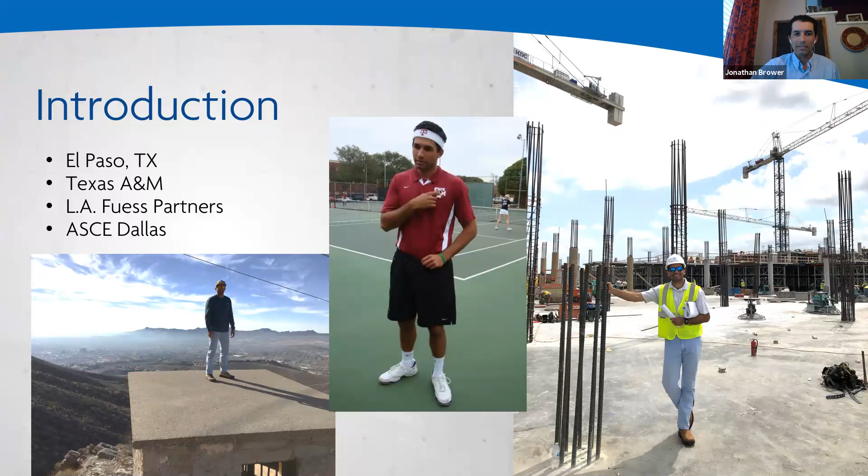He just turned 6 months old this past Sunday, and he's really the best part of 2020 so far. He brings a lot of joy to our lives, and he's a lot of fun to be around, and I can't wait for him to get home later tonight from daycare. I really enjoy running.

Running is my big passion outside of the work I do and ASCE. I enjoy waking up early in the morning, getting those runs done. I'm also a big Dallas Stars fan, so watching the Stars make that run to the Stanley Cup final this year was a lot of fun. Noah got woken up a few times by me yelling at the TV whenever they kept winning, so I'm sure he's in for a long ride with that too.

So now I'll hop in and give a little background on LA Fuess Partners and who we are and what we do. We are a building structural engineering firm. We don't do any heavy civil structures, we don't do any bridges. We are primarily focused on building design.

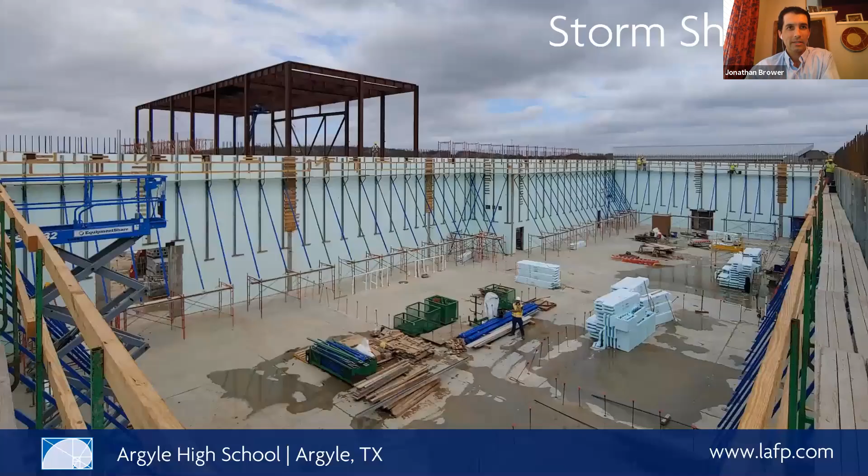Going along with K through 12 design, a lot of those projects now involve storm shelters. These are hardened buildings, again, designed to withstand varying degrees of tornado force winds. They require a lot of unique detailing and extra beyond-code-level design to ensure these buildings don't collapse in the event of a tornado.

Blast design is another thing we've gotten into, especially out there at Terminal D. Fascinating story that was before my time at LA Fuess Partners, but at Terminal D, the structural construction documents were sealed and issued for construction. They actually started drilling the piers out there on Terminal D. And then September 11th happened - the attacks on September 11th happened, and construction completely shut down.

They had to reevaluate what would need to be done within the terminal from an architectural standpoint in terms of new security features, and also how they were going to account for designing the exterior and the car side, basically part of the terminal, for any blast considerations if there was a terrorist attack in this area. So they had to go back and completely redesign a lot of the structure for some blast loads that were given to them by another consulting engineer. I thought that was a fascinating story about Terminal D.

For those who don't know, Baylor Scott and White is a major healthcare system here in Texas. They had offices scattered throughout the Dallas area and wanted to create a localized central location for all that admin to work in. So that's what brought about this facility. It is not a healthcare facility—it's an office, corporate office building, and a parking garage as well.

Let's summarize the project team. The core and shell architect was Perkins and Will, a very design-oriented architecture firm. They're always pushing the envelope, always challenging their engineers to come up with designs that are sleek and slim, really pushing the boundaries. It's a lot of fun working with them because they push us and produce beautiful buildings. Interiors was done by Corrigan Architects, another big architecture firm.

Civil engineer was RLG, MEP was done by Telios, geotech was ECS, and of course LA Fuess Partners—we were the structural engineer.

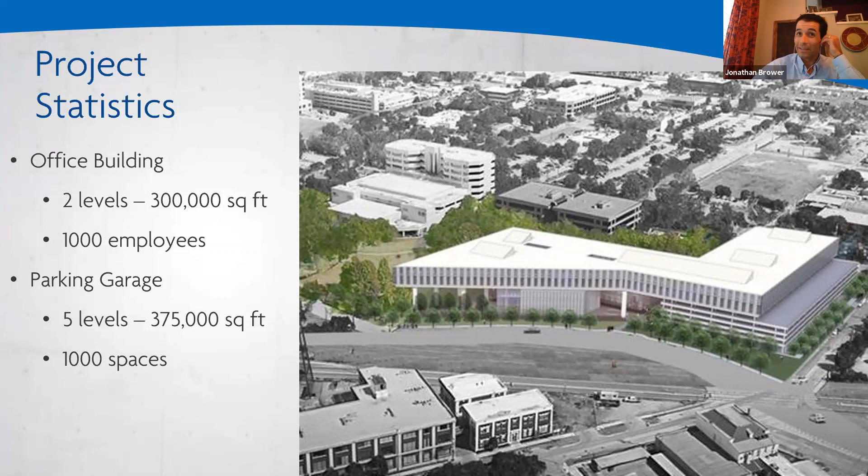Some major milestones and basic facts: total project cost was $70 million. We began design in early 2018—I think I first started engineering calcs and creating models around March 2018. We issued an early foundation package and began construction in October 2018. It was structurally topped out last summer, and about a month and a half ago they started having employees working there. I think they're at about 50% capacity right now.

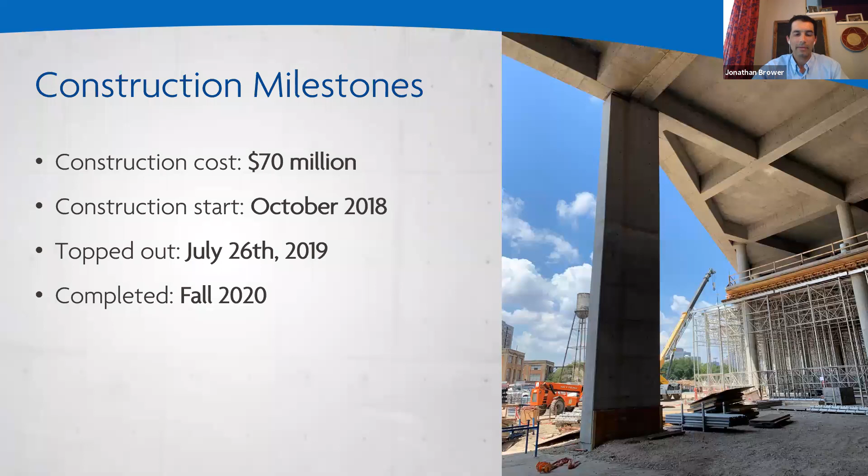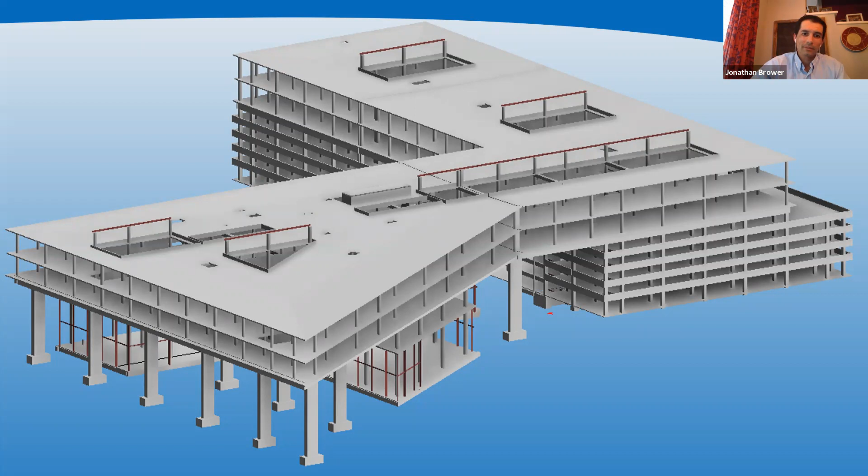This is a look from the other corner of the building. You get a good view of the parking decks and then the 2 big floor plates that make up that 300,000 square feet of office space.

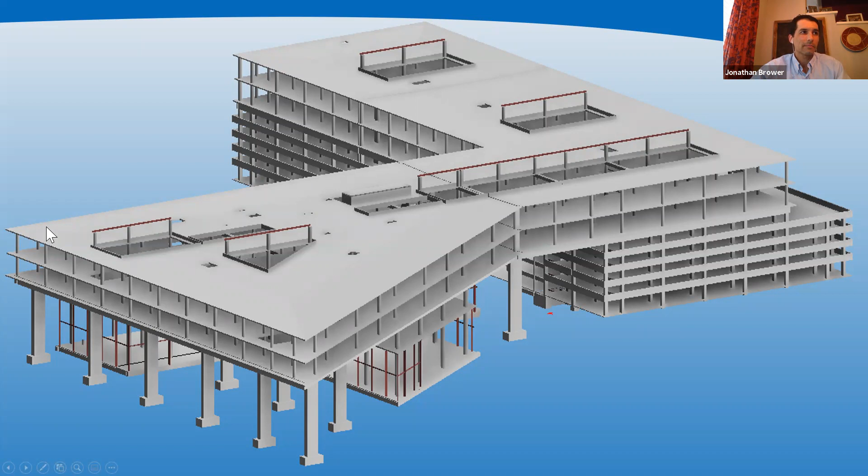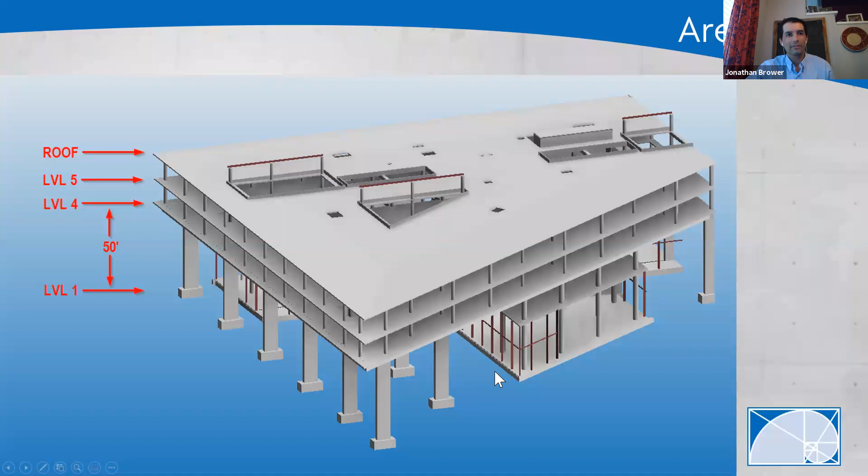Today I really want to focus on what I'll call area A and B, this trapezoidal shaped part of the building on the bottom left of your screen. What makes this part unique is that we do have some occupied space in the middle of the building on levels 1, 2, and 3, but the majority of occupied space is up on level 4, which is 50 feet in the air, 50 feet above our pier caps. We had a unique challenge needing these super tall columns, with extra complication added when the architect wanted to remove more than half of the columns. I'll explain that next.

This is a look at the typical floor plate at the roof and level 5, the two levels above level 4.

This was a pretty typical 8-inch thick 2-way PT slab on 24-inch diameter columns. There were no drop caps or drop panels. We had shear stud rails in the slab so that we could eliminate those. The grid spacing was 30 foot by 30 foot, which is pretty typical for an office. So this was, for the most part, a simple PT slab design.

For those of you that may not know what PT is, that's post-tensioning. So those are cables that are laid out in the slab, and after the concrete is poured and has reached a specified strength, they pull those tendons and pre-compress our concrete slab. The simplest way I can describe it is you imagine tying a rope to a tree, and then you lean back and pull on that rope.

Then you get your friend to come along and jump up on that rope, and they might start to sag a little bit, so you need to pull a little bit harder. But you can only pull so hard, so you bring your other 3 friends over and they all start to pull on that rope. As you all pull together, you're able to put more force in that rope and help lift your friend up as they balance on the rope tied to the tree. So that's what post-tensioning does - we're trying to balance out the loads on our structure, and it allows us to create a structure that is much thinner than you would ordinarily need without post-tensioning.

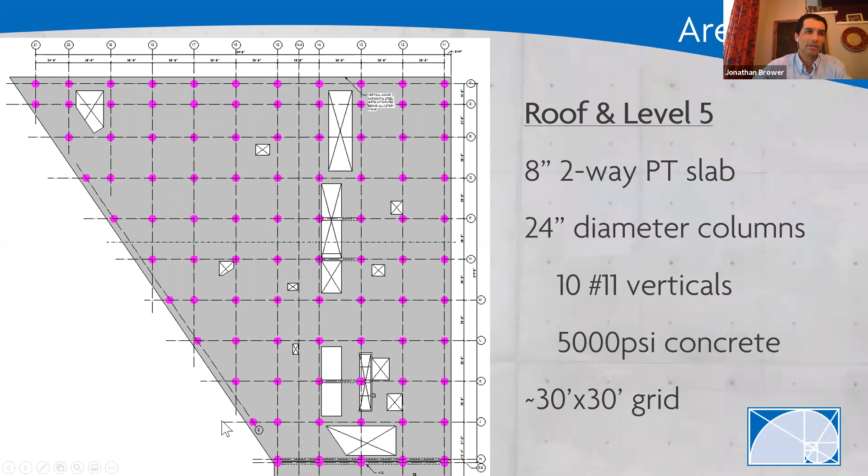But when you get down to level 4, this is what one of the engineers in our office deemed the super floor. The architect wanted to eliminate every other column in both directions. You can look closely and still see little pink dots - those are the columns above that go up to the roof level. In neon green, I tried to highlight the columns that go down to the foundation. So only the columns in green here go down to the foundation; all the other spots where you see pink dots, we had to somehow resolve all of those column reactions.

The way that we did that is we created this network of 3-foot wide by 5-foot deep transfer girders, outlined in blue here. It creates this waffle slab looking kind of structure. These are PT girders acting in a two-way fashion so that we can transfer all of these column reactions out to our big green columns that actually go down to the foundation level.

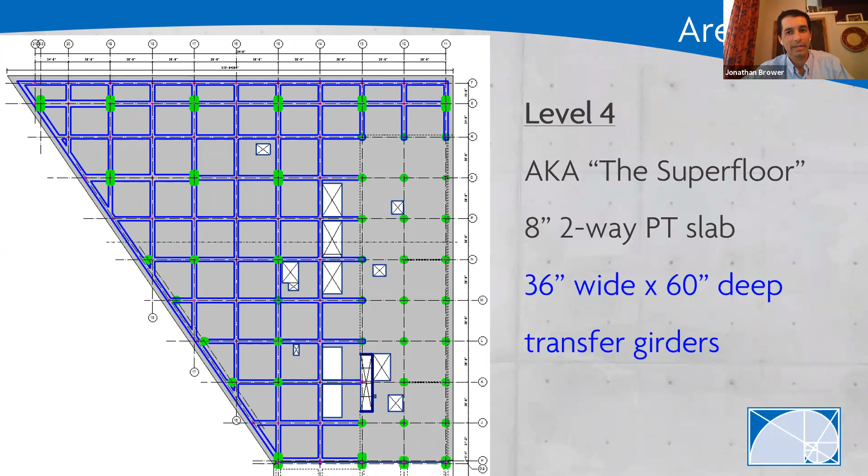I'll zoom in a little bit here on the pointy corner so you can get a better idea of what's going on. We did have to do some cantilevering out here to pick up this diagonal edge. This was a really tricky part of the design.

I used a program called RAM Concept to model and design this post-tension floor system. RAM Concept is pretty commonly used when it comes to two-way slab design, and I was able to use the power of Concept to create this unique two-way girder system.

So yeah, when we eliminate every other pink column in the other direction, we go from a typical 30 foot by 30 foot grid to a 60 foot by 60 foot grid. These green columns are basically all at 60 foot on center.

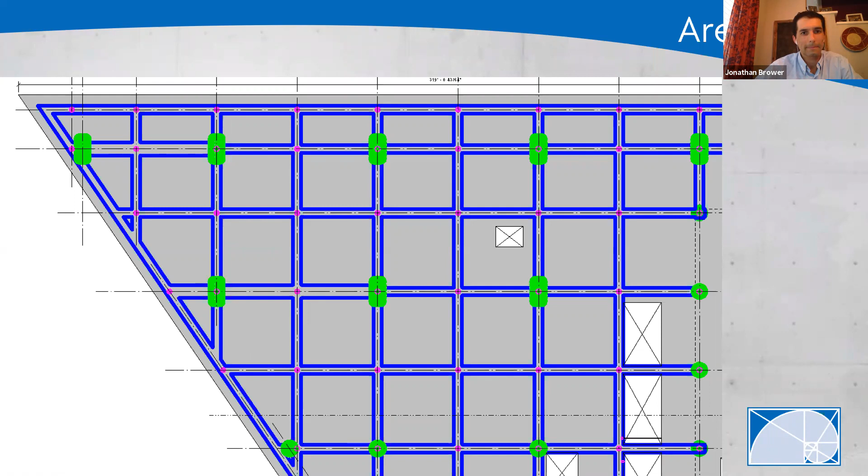So construction began, and I got to go out there and start looking at stuff. This is a look at the formwork on these transfer girders before they started dropping in some rebar cages. These red tendons you see are the post-tensioning tendons. So it's really remarkable to see this formwork out there.

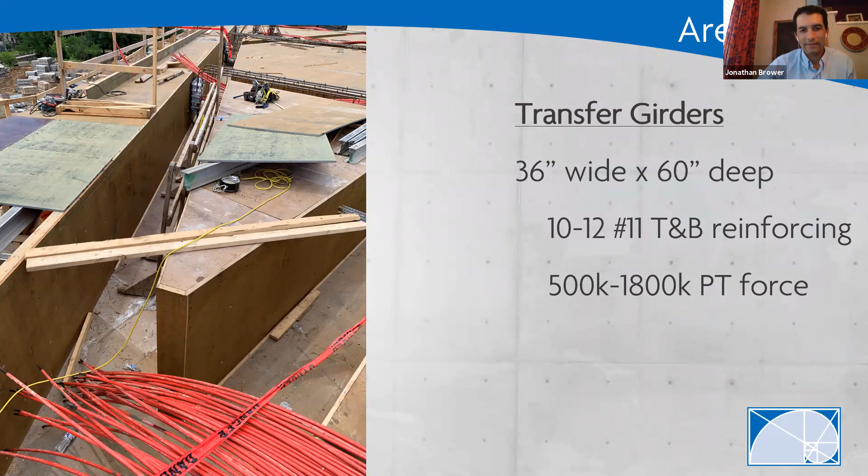I went out there the next week. This is that exact same corner of the building. They've got the rebar cages in there, and if you look closely on the bottom left, you can see there's a guy down in there working to lay out the reinforcing and make sure everything is oriented correctly. It was remarkable to me to go out there and see this transfer girder that's big enough to fit a person.

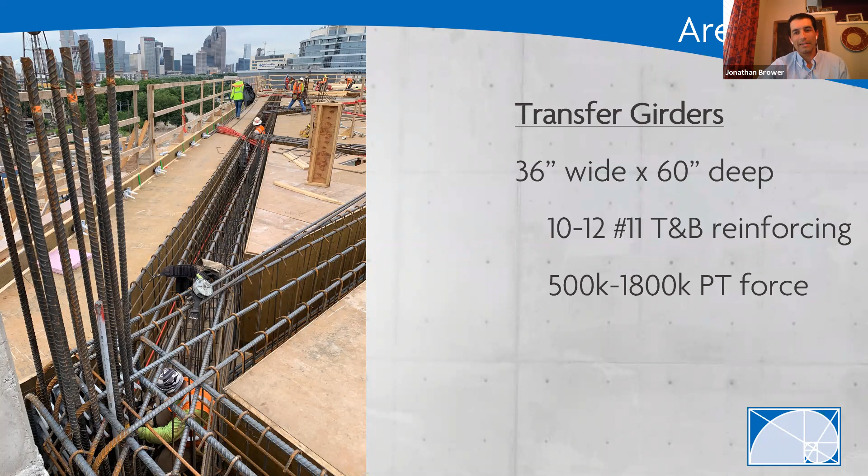This is another look down that same girder. You can see there's another guy now squatting down in there trying to make sure all of our stirrups are in the right location, and also making sure that those PT tendons get slipped into their anchorage locations properly.

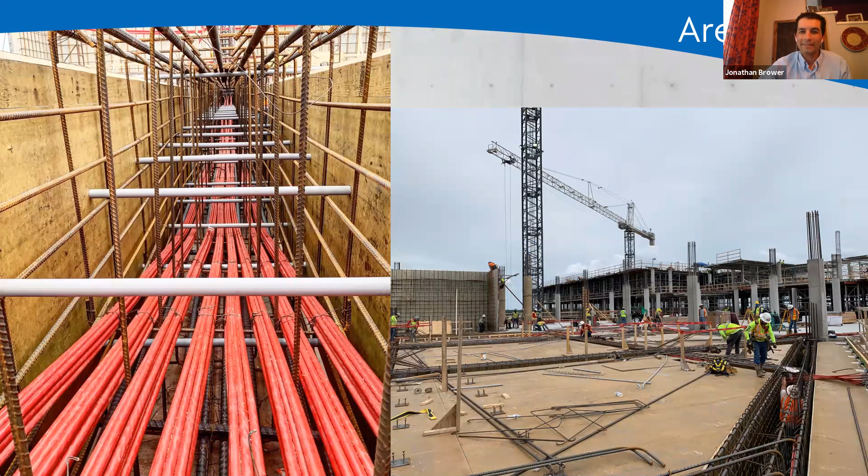This picture on the left is me sticking my hand and the camera down into the rebar cage, and you get a good look at all those PT tendons in these transfer girders. Those red tendons are like the rope I described, where you attach the other end to a tree and try to pull and balance up your friend who's trying to slackline on the rope.

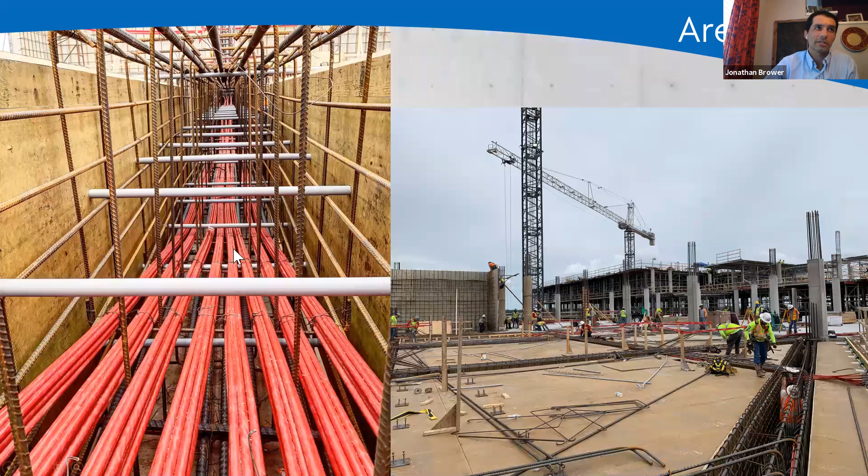That's what these tendons are doing. We're trying to counterbalance all of the floor load and column reactions coming down from above. And another really cool photo there on the right of the whole construction site as they started to go above level 4 in area C and D.

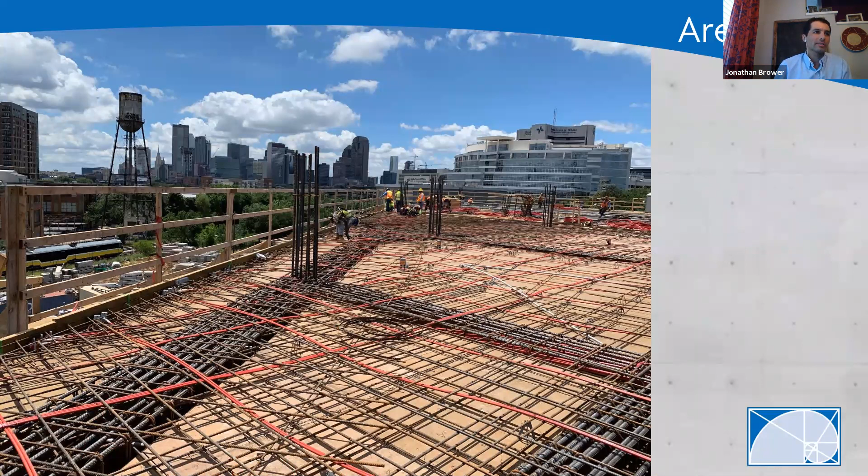Here's a look at that same corner with the majority of the reinforcing and post-tensioning cables laid out. You get a nice view of downtown Dallas on the back left, and Baylor Hospital on the right. This was pretty much the day before they poured the concrete on this first part of the superfloor.

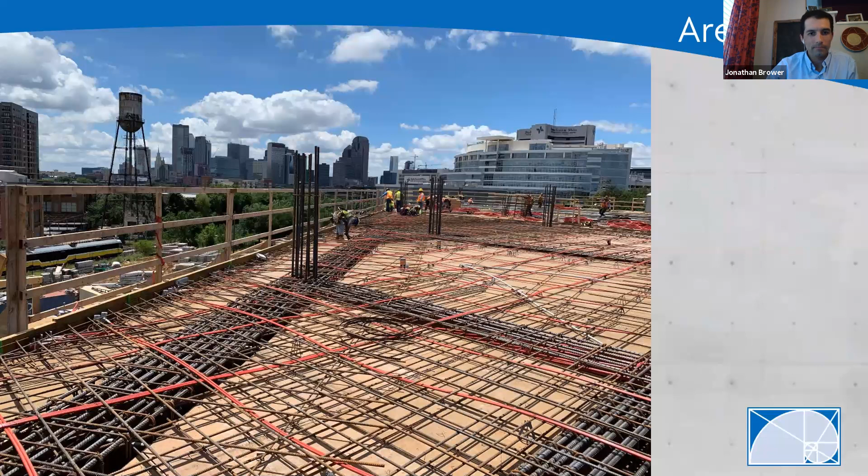So a few weeks went by, and they got the concrete cured. They pulled all the post-tensioning cables. I reviewed every single tendon pull, made sure it was to our specified force, and then they got to remove all the shoring and formwork. This was the end result. It was really amazing to go out there and stand underneath all of this and see everything I've been working on for months come to fruition.

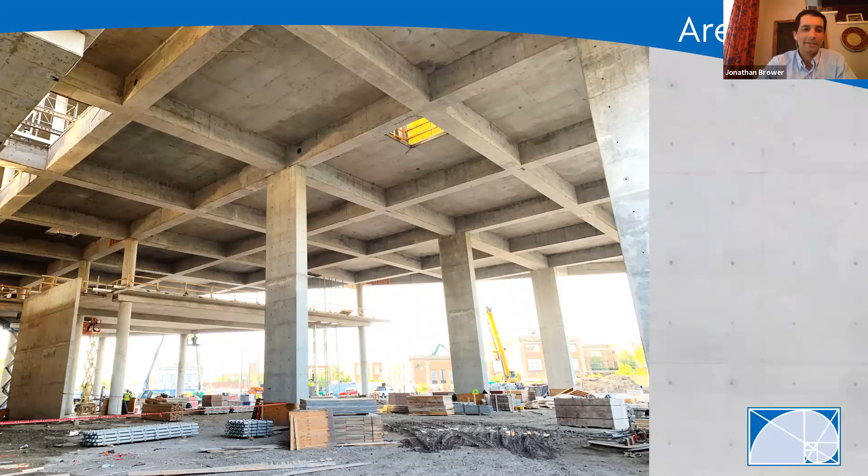The architect didn't like the waffle slab look as much as I did, so all of this actually got covered up with a soffit. So when you go out there now, you won't see this waffle slab looking thing anymore, it's all covered up. So I made sure to go out there as much as I could before they covered that all up and get lots of photos, and that's what I'm going to show you all now.

So here's a couple more photos walking underneath the superfloor. Austin Commercial was the general contractor on this. This is my friend Chris, he was one of the superintendents out there on site, so he would always walk me around. It was really fun to learn from him and get feedback on our design and details, and talk about ways we could do it better next time.

There's a really good look at that pointy corner and the massive blade columns that we have going up. It's just really impressive to stand under here and see these really big columns and these long spans supporting all of this structure above.

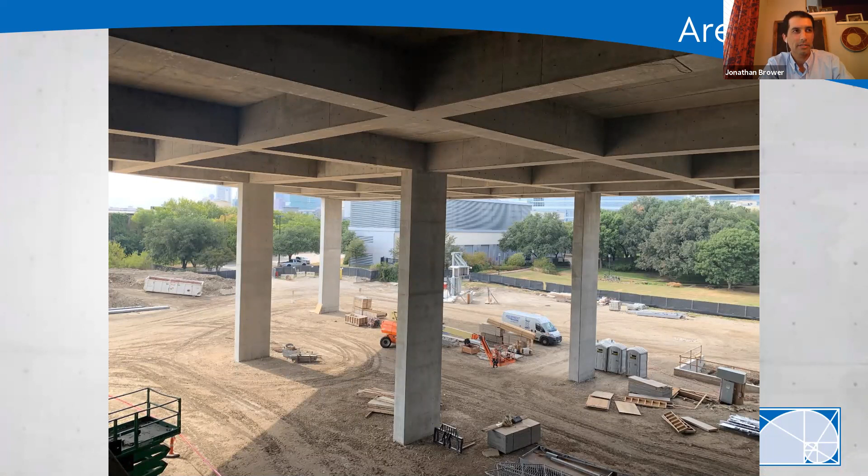This is a perspective from level 3. I mentioned that there is some occupied space below the superstructure, so that's just some office space, and there's actually a small conference center that Baylor Scott and White uses. But I thought this was a really cool photo, looking at that network of transfer girders.

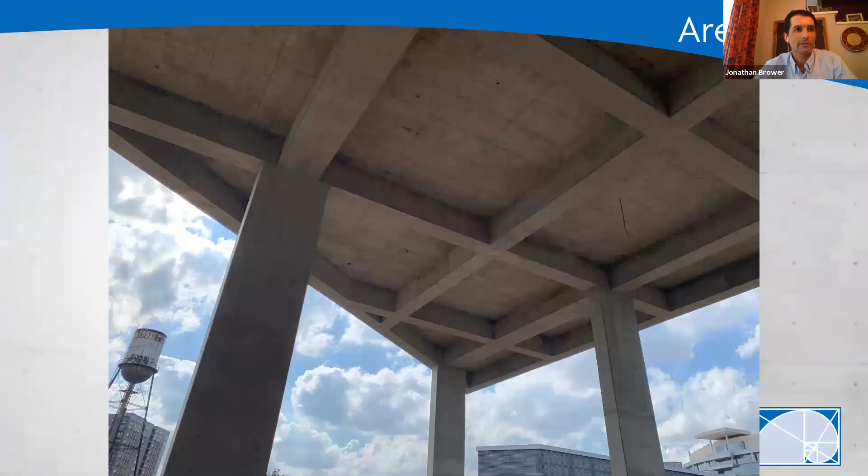Another really good look at the pointy corner of the building once all the forms had come down. It turned out really nice. We didn't have a lot of consolidation issues with the concrete. We got this nice clean bottom of beam surface, even though we had this really deep 5-foot structural beam.

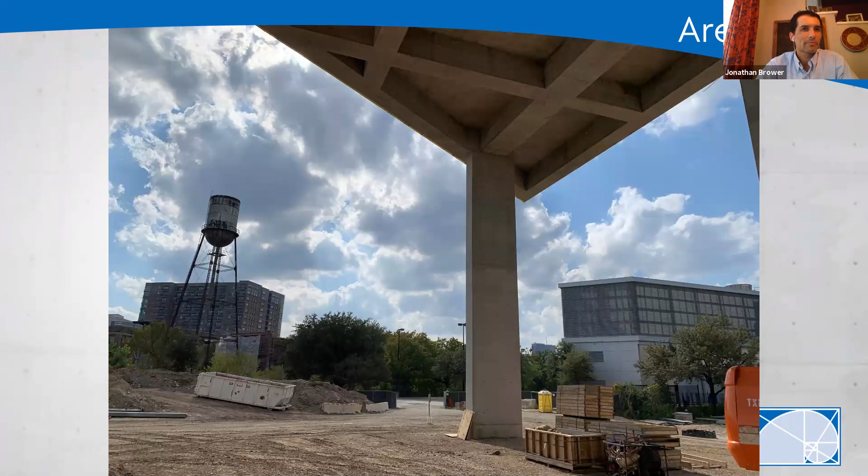Again, I just love this pointy corner, I was taking lots of photos of it. There's this old water tower over here, so I thought this was a really cool photo, just seeing the perspective of this massive column next to this kind of spindly water tower here on the left.

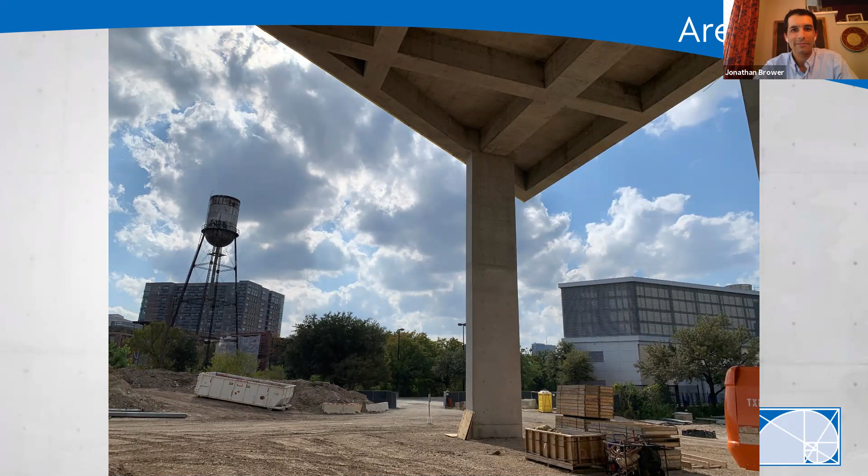This pointy corner, in addition to this massive cantilever transfer beam that I had to design, it was also kind of finicky designing the points of this slab. Relatively speaking, designing a slab to cantilever out like that is pretty simple, but we wanted to be really careful that none of this concrete would spall off later on. So I spent a lot of time drawing details and getting supplemental reinforcing in these pointy corners so they stayed pointy and you didn't get concrete chipping off in the wrong place. And it looks really cool when you look at it from below.

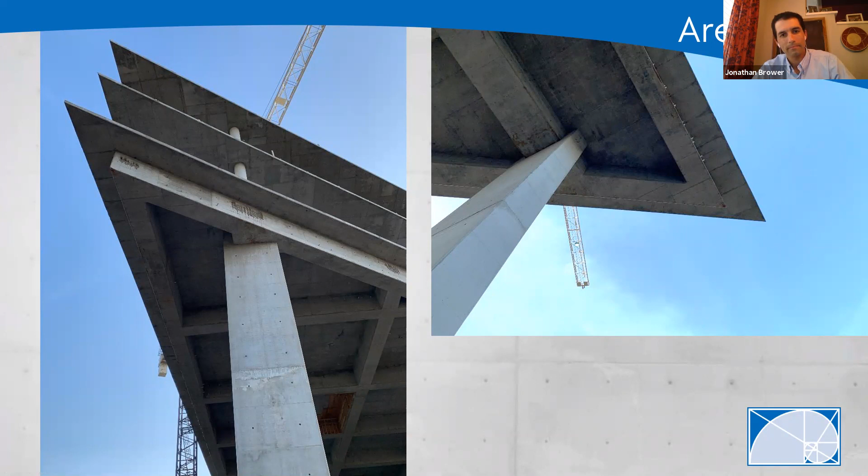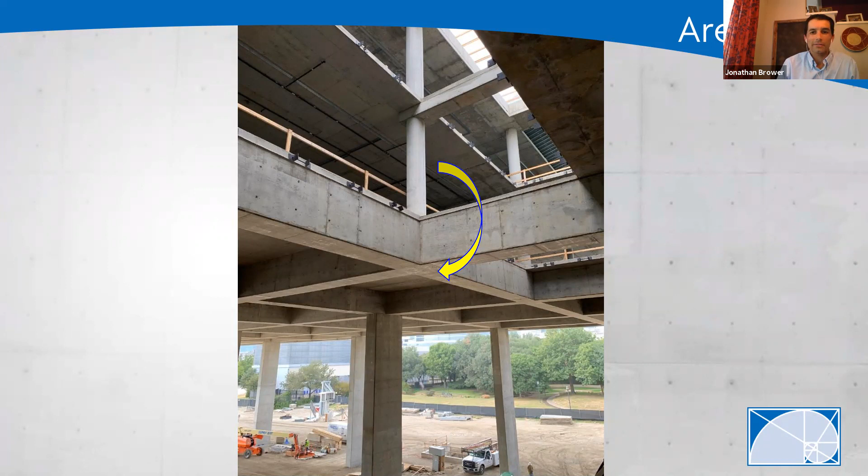So here are my 2 favorite photos from the whole project, and I think this perfectly illustrates the structural engineering magic that had to happen on this project. You see a column coming down from the structure above, supporting the roof slab and level 5 slab, comes down, hits level 4, and then it just disappears. So you have nothing there, and you get a good look at our 5-foot deep PT transfer girders that are carrying all of that load out to our big blade columns.

Here's another good look at a column by an opening, so you get a good view of that transfer happening. I remember this was at the topping out party, and I was walking around the building with the geotech, and he asked me if that was supposed to be like that. I pretended to freak out and be scared for a second, like they forgot a column, and then I told him I meant to do that the whole time. It's a lot of fun to show people these photos, because I think it perfectly illustrates what's happening at these transfer conditions.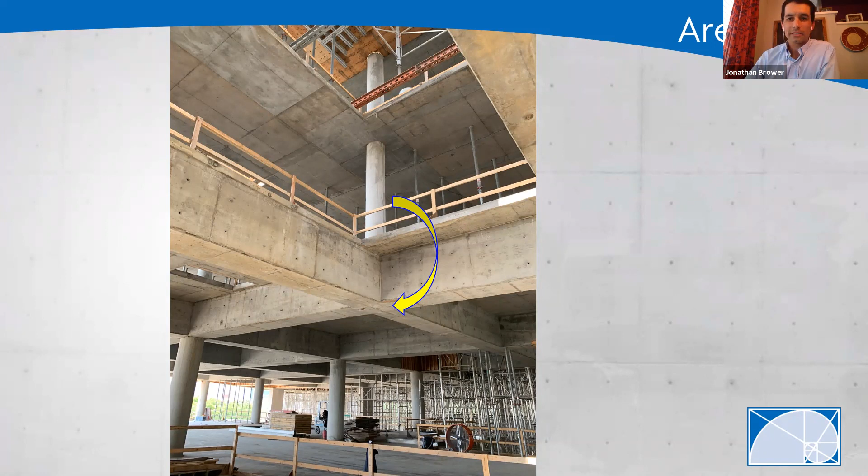We had another unique transfer condition in area C of this building. This whole time I've been talking about area A and B. Right here you can see we have double columns, with a little joint between them - that's our expansion joint. So everything to the right is area A and B, what I've already been talking about. Everything to the left is area C and the parking garage below.

Right when you get to area C, there's actually a road right here - this is Race Street. It was an existing road, and it's still there now. The building kind of straddles this road, which required some of the longest transfers we have on this job. Those other transfer girders in area A and B were a network of two-way transfer girders spanning 60 feet on center. This is actually a 65-foot transfer span, so it's longer than area A and B. If you look closely in the middle of this transfer girder, you can see the column coming down.

There's a set of those columns at all 5 of these transfer girders. And it's kind of hidden behind this piece of facade, but there's another set of columns that also gets carried by these transfer girders.

Now, the other unique part about this expansion joint and the location of these transfer girders is that the architect really wanted these big, massive columns to look like a solid column all the way down. Typically when you get to an expansion joint in a building, you have double columns, and that's what you see above - 2 columns supporting the structure on each side of that expansion joint, basically 2 separate buildings. But because they wanted the solid column look, we actually have a column straddling our expansion joint, which we can't have hard tied to each other on each side.

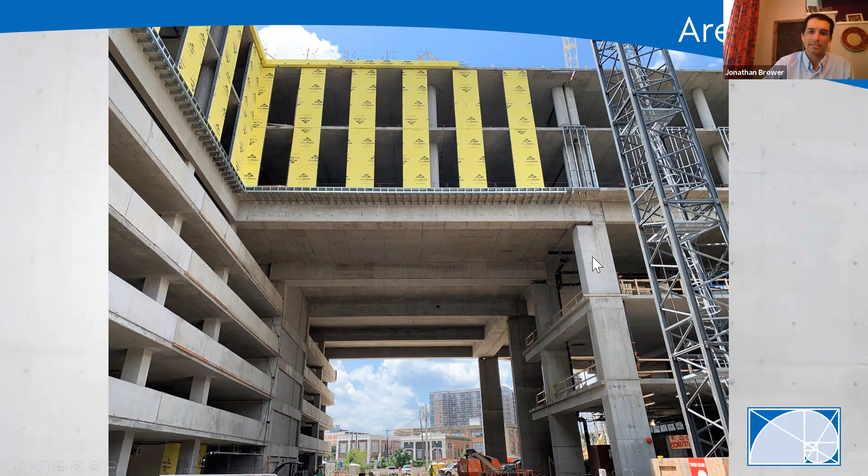So we actually had to design slide bearing connections that these transfer girders would sit on, so that the left side, area C, that building could shrink and grow as the temperature changes, and it wouldn't start to tug on the other side of the building. It has a little slip connection in it. That's something you'll see a lot in road bridge construction - these slide bearing connections.

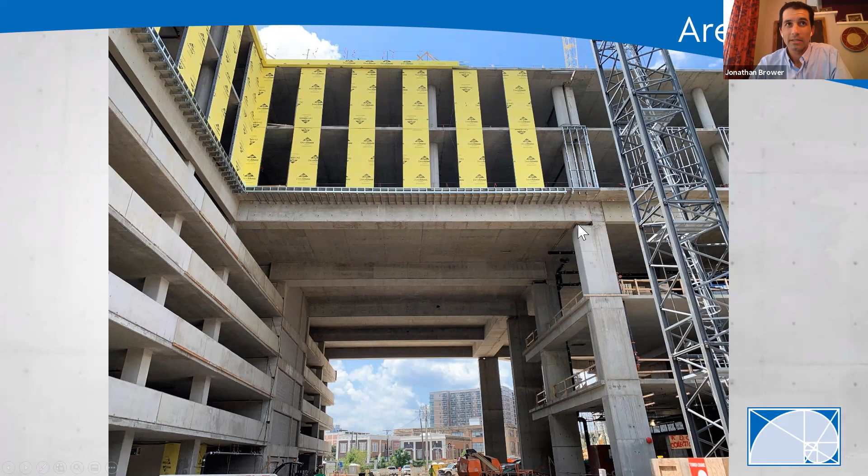That's a very typical connection type for bridge engineers. For building engineers, it's not so typical. So that was a fun little component to get to look into.

Here's a close-up picture of one of those slide bearing connections. You can see this foam board that's in here. That's just what the contractor used to form up the concrete on either side of this expansion joint to create that separation in the building.

And then we have our transfer girder here, and it's sitting on this slide bearing connection. This slide bearing connection made the design of these transfer girders really challenging because we were no longer able to use the stiffness of the columns below to help out with our girder design.

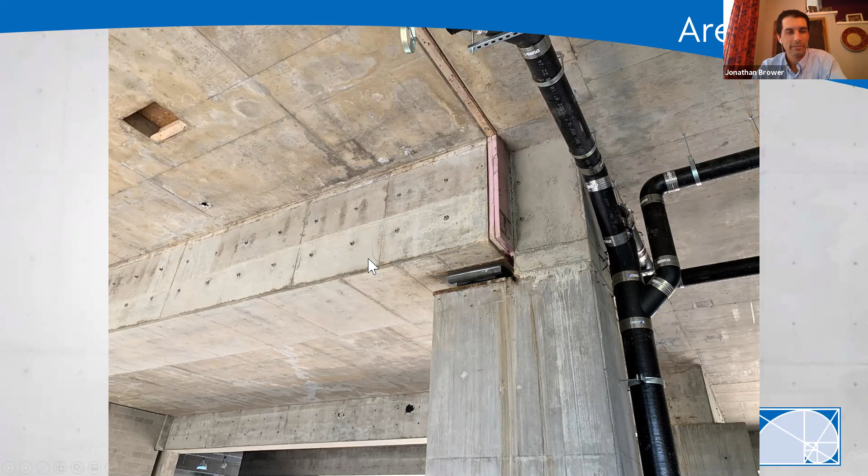So instead of having a fixed end connection to design our girder and get some help on the flexural design, we had to design it as a simple support here. These girders were probably one of the more challenging design aspects, just because they were the longest span, and I wasn't getting to use the stiffness of the columns below.

Next, I wanted to talk a little bit about some means and methods, construction stuff, and the shoring that had to be designed just to pour our superfloor was actually pretty remarkable. As the building structural engineer, LA Fuess did not get involved with the design and engineering of this shoring, but I have lots of photos because I thought it was really fascinating. It's a pretty structure in and of itself.

So this is the Race Street transfer girder location. These are those big 65-foot long transfer girders, and they're also 50 feet in the air. The shoring engineer had to design these massive supports that went all the way up 50 feet and could basically support all the wet weight of our concrete before it reached its design strength.

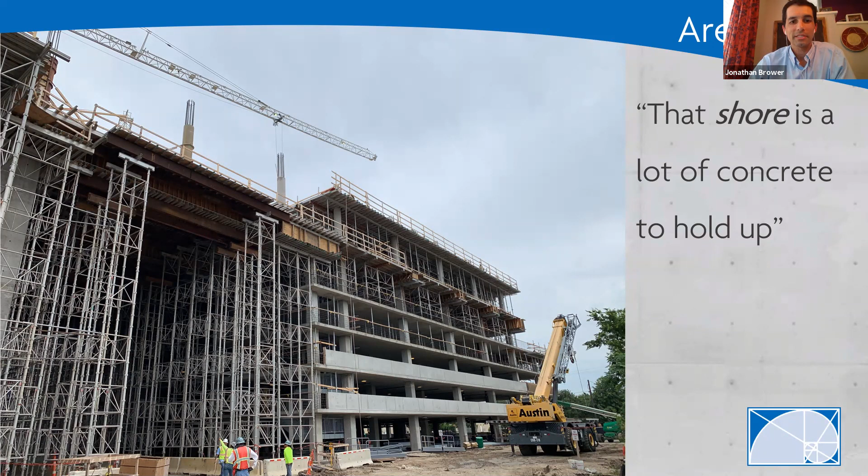This is a look at the shoring that had to be put in place for the superfloor. You have to build this deck 50 feet in the air for all of the formwork people and rebar installers to come in and lay out the rebar so they can pour this deck. It's just this massive forest of shores that had to be built. It's like a massive structure to build another massive structure. I thought it was really impressive.

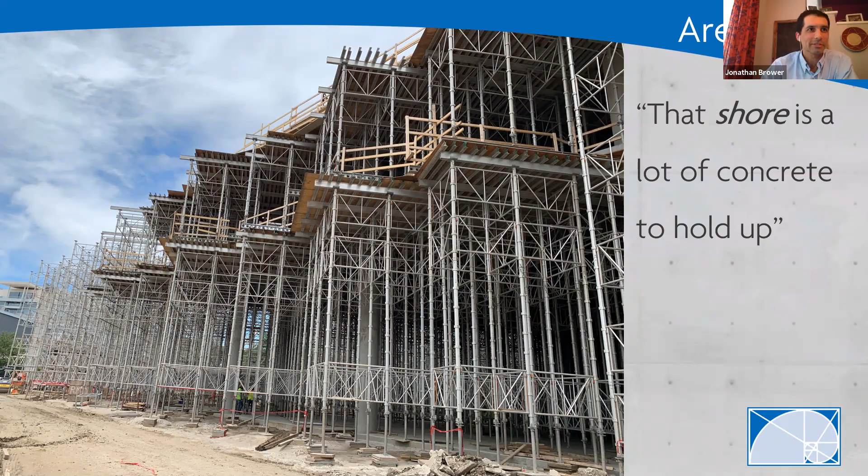I was climbing up a ladder to get up to the level 4 deck one day, and I looked back and just saw this forest of shores behind me. So I thought it was really cool to take some photos of that area.

I've been mentioning a lot these blade columns. This is another term that got coined in our office to describe these massive columns that are 60 feet on center. These are large rectangular columns, 32 inches wide by 96 inches deep. They have 34 number 11 bars, which sounds like a lot of rebar, but it's actually only 1.7%. For those of you that are structural engineers, you know that for most building columns, you'll get up in the 2 to 3% range. So it's not a ton of reinforcing, but these are really big columns, 7 KSI concrete.

These columns actually could have been a little bit smaller—I think around 32 by 72 inches deep, so about 6 feet deep. But the architect wanted these columns to look intentionally massive, robust, for when you come up to the building. So they wanted the columns bigger than we actually needed for design. I thought that was a funny conversation to have with an architect—usually they're pounding the table asking you to make columns smaller, and here they were asking us to make ours bigger. That was a very unique conversation, and it doesn't happen all the time.

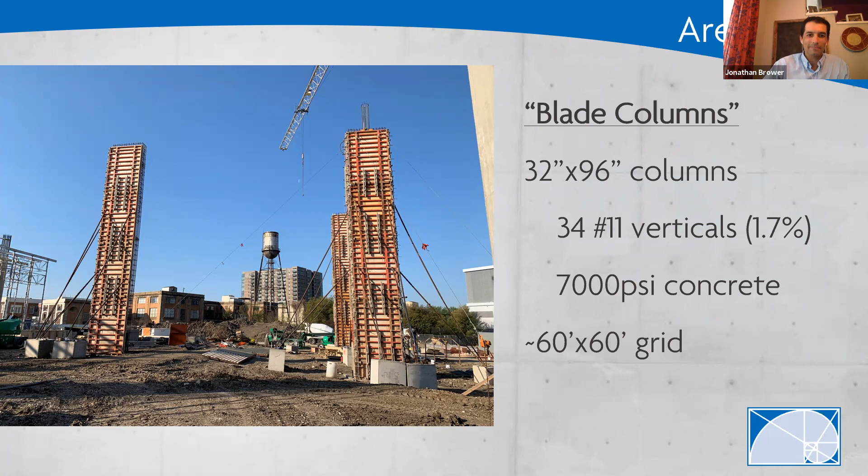The shoring that had to be built for these blade columns was also very impressive. Again, LA Fuess structural engineer, we did not get involved with this design - this is means and methods of construction. It's up to the general contractor to delegate out this design, but it was really remarkable to see all of this formwork in place. They have these massive struts going back that are anchored to the ground, just so they can pour these massive blade columns.

As you can imagine, as they start to pour concrete in here, all that hydrostatic pressure that starts building up with the wet concrete can get pretty big. So they had some really impressive engineering work on this formwork just to make sure the forms didn't blow out the sides as they started to pour these columns.

Much to the chagrin of the architect, they were not able to pour these columns in one pour. If you look closely, you can actually see a construction joint here where there were two separate concrete pours. They fought hard to get that in one pour, but it just was not going to happen, so the architect had to live with some construction joints, or cold joints, in their columns.

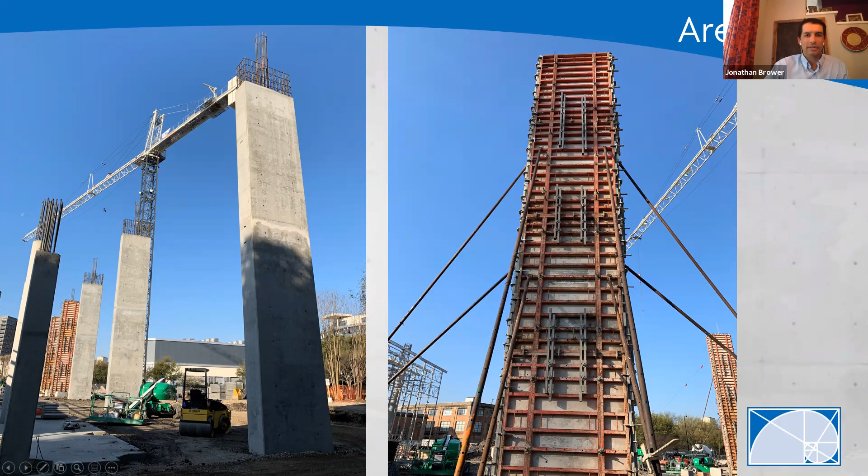Here's a couple photos looking at those blade columns when complete. In these photos they have yet to put up the formwork and shoring for the superfloor, but you get a good feel for the perspective of how massive these columns are - there's some workers below and you just see how big these are. It kind of looks silly when you see these little 24-inch diameter column cages sitting on top, but those are the columns going up to the roof level.

All right, topping out party. This is the best day for a structural engineer, when the building is, for the most part, structurally complete. They're going to put up the last structural element on the building, and the general contractor throws a big party and invites everyone out.

This was a steel tube that was going to go up on one of the light wells on the roof. They paint it white and let all the consultants and every single person who worked on the project sign it. So there's my signature on this steel beam that's now up on the top of the roof of this building.

This is the engineering team that worked on this project - there's me on the right. Erin Janacek is standing right next to me; she is the engineer of record on this project, the one who sealed this building. She's my mentor and team leader, and I've learned so much from her and really appreciate being able to work on these really cool projects. She's a great engineer, and because she's a great engineer, she gets to work on great projects like this.

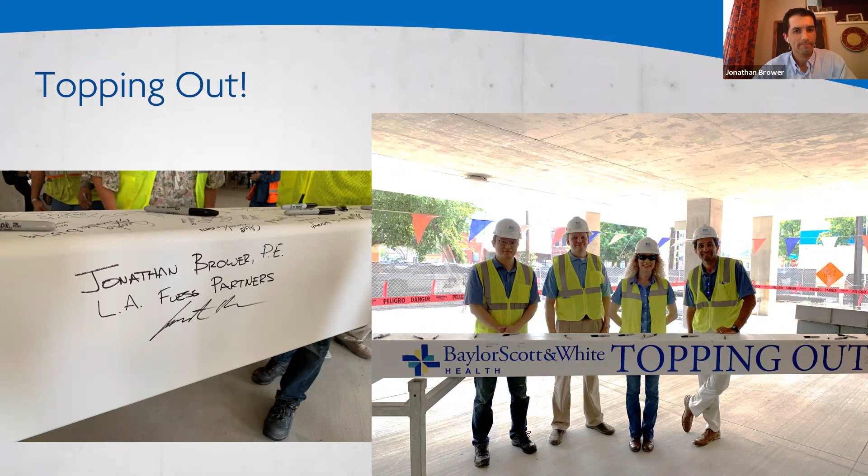So here's some photos from the topping out party. This is a view again from the Washington Street entrance. This is Race Street going down through the middle of the building, underneath this transfer girder. At the topping out party, they started to put some of the glass in, and then they had barbecue served on the parking decks, and everyone was sitting under here away from the hot sun.

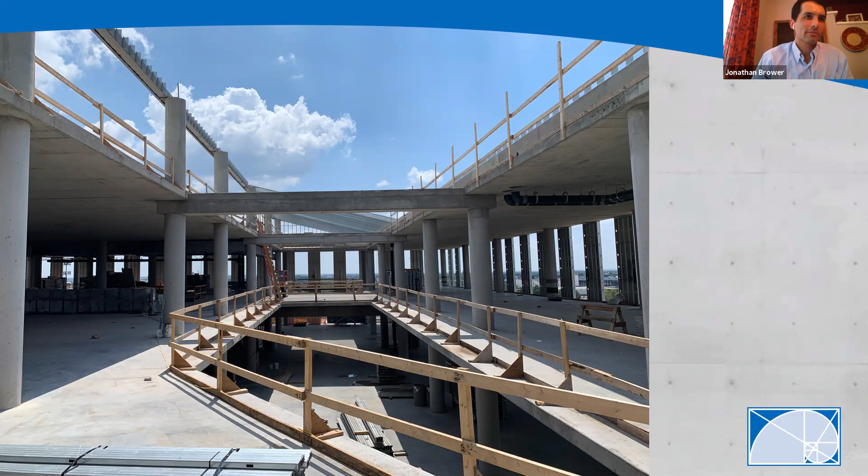After we had barbecue and ate a bunch of food, we got to go walk through the building and show the architect and some other engineers, giving them a tour. So I took lots of photos then. This is a look from the Area C office area, standing on level 5 - this is one of the light wells in the building. This was a feature the architect put in so they could let in a bunch of natural light into this office space, so that in this open office area, even if you're far away from the big windows around the perimeter, you could still get some natural light coming into your workspace.

There were lots of big openings in our floor slab to let in all that natural light. During construction, when you just see the bare structure with all these massive holes and blue sky above, it was really fascinating to walk around and see what this flat plate PT slab construction looks like when it's complete. It's really pretty magical because you just have this really thin 8-inch slab profile.

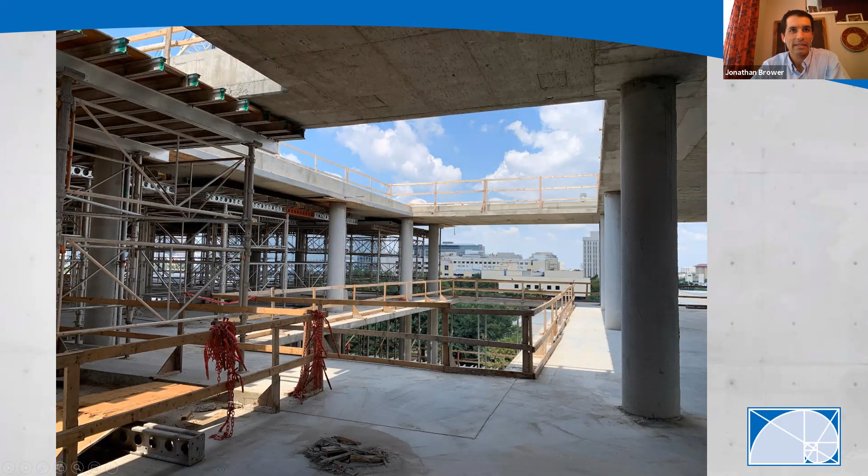Here's a look from area A and B, looking back over to area C and D, which is the more office space and the garage below.

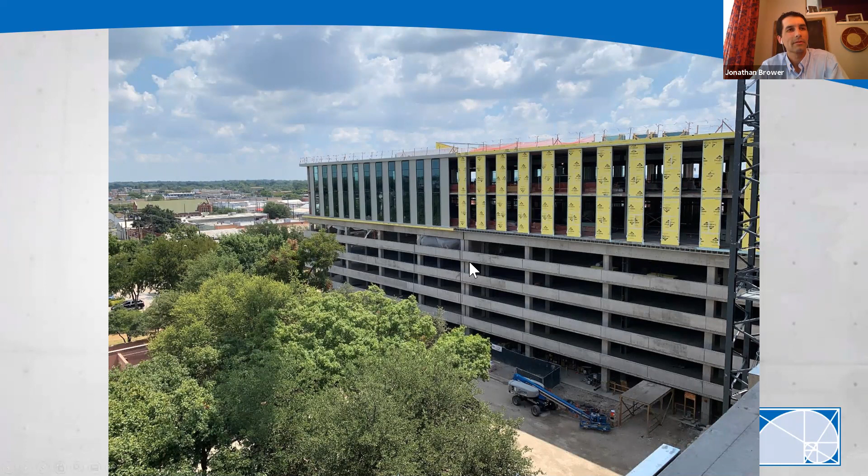I mentioned an expansion joint earlier in the presentation. Here's the other expansion joint. This building was so big it had to have two expansion joints. Look closely, you can see double columns going all the way down. This is what a typical expansion joint would look like, with a column on each side of that joint.

Here's a look at one of the open office areas. Again, just beautiful floor to ceiling windows letting in tons of natural light. For those of you familiar with Dallas, if you were looking out these windows, you'd be looking over at Fair Park and the Ferris wheel.

More photos from the underside of the superfloor. I was trying to soak in as much as possible of the appearance of all these transfer girders and get an appreciation for the magnitude and scale of these massive blade columns. This is a photo looking from the underside of the superfloor, standing on level 3, looking towards the parking garage.

You can see a group of people standing down here at the entrance to the parking garage. That's the main entrance to the parking garage, and that's where employees now walk out of the parking garage and into this building.

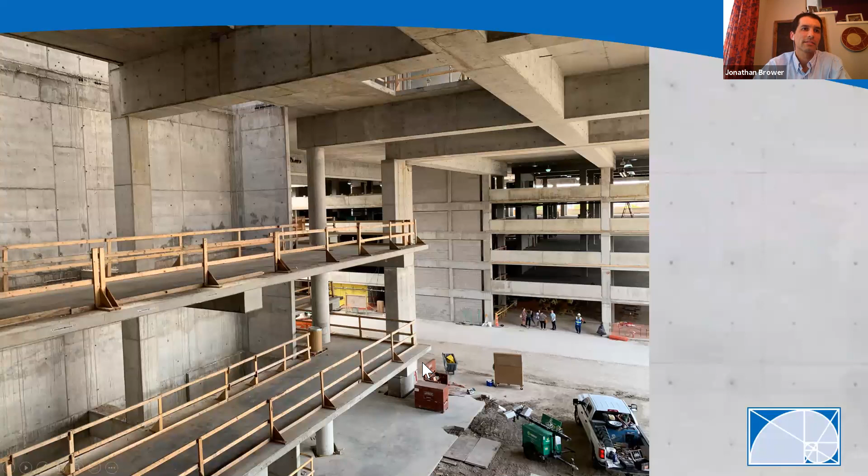Right here where these two toolboxes are, that's actually the main doorway into the building, and then this is the lobby space. There's I think four elevators, a bank of four elevators right here that are kind of wrapped by these shear walls. So those big slots you see here - those are elevator shafts now.

This is my favorite photo from the whole job site. You get a beautiful look at downtown Dallas there on the back left. You have Baylor Medical Center there on the right. And then you just have this kind of teeming job site below.

There's always something going on every time I went out there. They're always pouring concrete either on columns or on one of the floor slabs. There's always people laying out rebar and post-tensioning cables. It was kind of just this amusement park of construction going on. And this is why I became an engineer, because I love seeing stuff like this in action, and I love going out there and watching my structural designs come to life.

Now, in addition to all these big transfer girders and very complicated slab designs we had, there were also some very small components and details that I got to work on. In addition to doing all these big things, I really like the little things, and I like getting into the nitty-gritty details, even when it comes to a guardrail base embed.

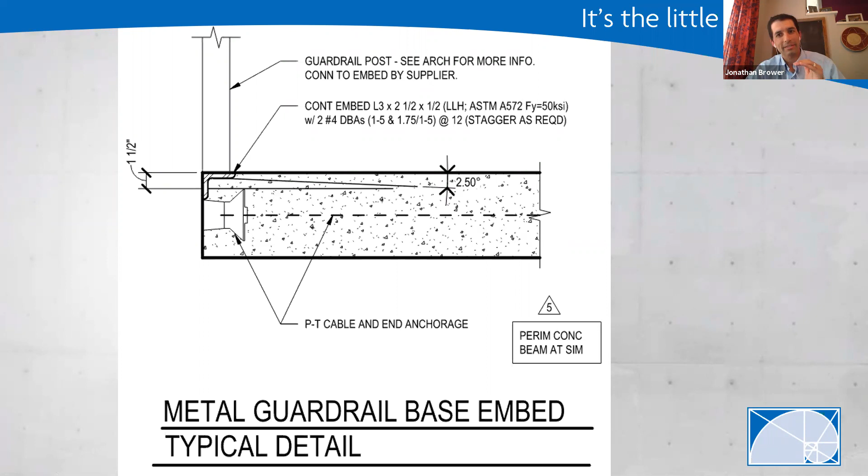So I spent probably a week of total time, spread out over several weeks, designing a post-installed anchorage connection that not only satisfied our design loads required by code for a guardrail, but was also aesthetically pleasing for the architect.

The architect the whole time was expecting this nice flush look, where the embed would be in the same plane as the top of concrete and you wouldn't even notice it was there. But now we have to stick something on the outside, and you're going to know that something's there. And when it comes to bolting these plates down, a lot of times you're going to have a bolt head and a nut sticking out of the top of the plate. The architect didn't like that either - they didn't want to see bolt heads and nuts every foot sticking out of their guardrail base.

So I had to do some research and find some countersunk anchors. I also had to figure out how I was going to resolve the guardrail forces when someone's pushing or pulling on it. I designed a force couple using a couple different sizes of anchors so that I could get the plates as small as possible and get the anchors dialed in, so I knew I was resolving the forces I'd be experiencing from this guardrail.

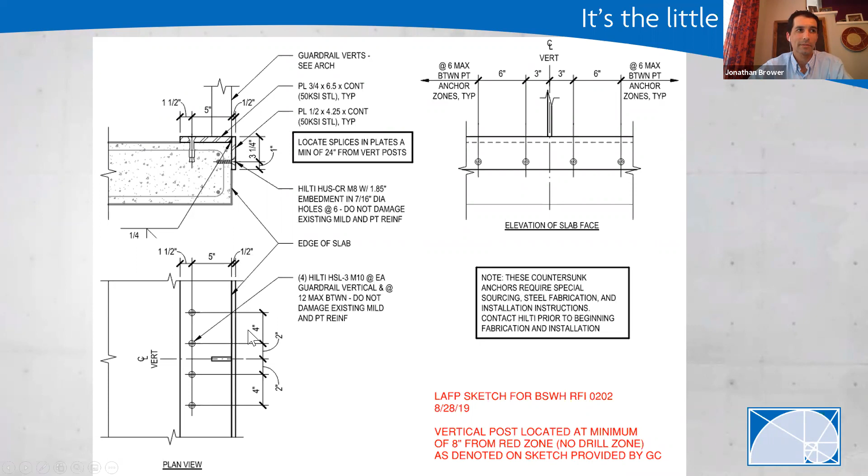So this was, like I said, about a week of my time spent on this one detail. But I loved every minute of it - it was a lot of fun researching it, trying to figure out the best solution for the project and the best solution for the architect and the owner.

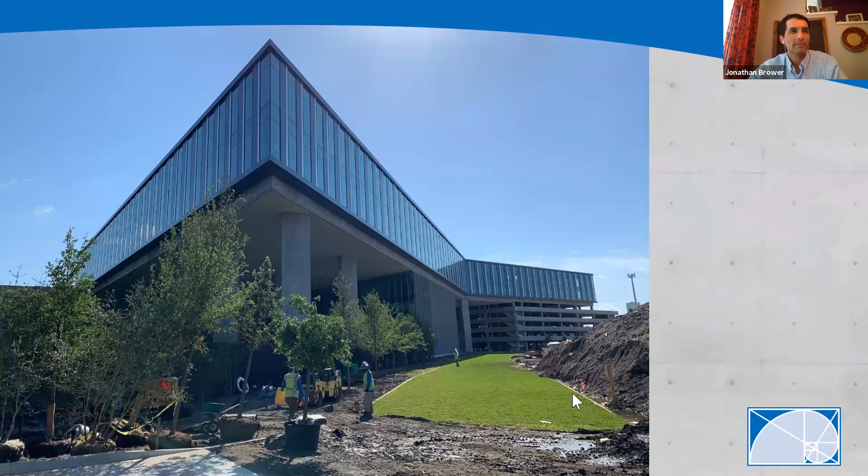And now you can start to see that they've covered up my beautiful transfer girder system - you don't see that waffle slab anymore, you just see this nice flush soffit. Here's a look again from the northwest corner, looking at the underside of that superfloor and just the massive space that was created by these transfer girders. Here's standing underneath the superfloor.

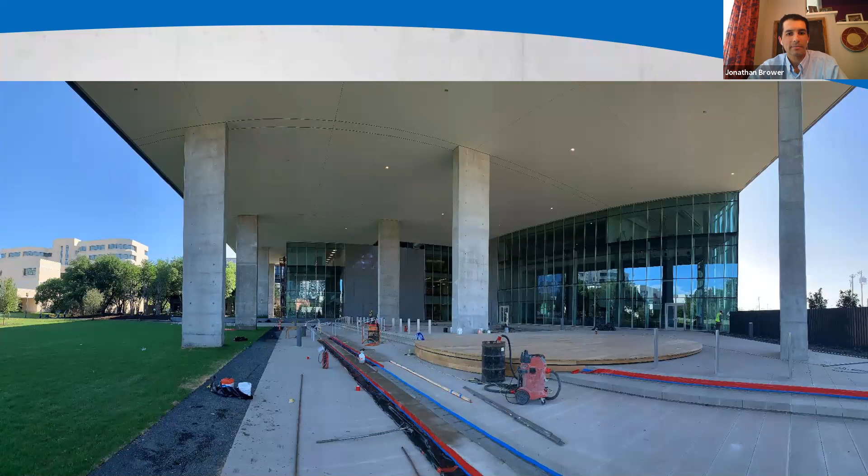This is a space that's going to have tables and chairs for people to just come out, relax, enjoy a lunch break, get some fresh air, but also have protection from rain and the sun beating down on them.

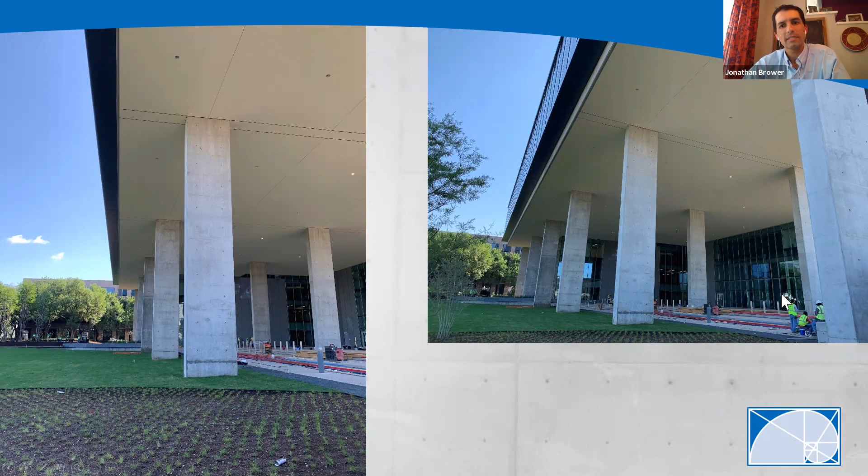Again, more photos of that underside. You see these really tall curtain wall panels here on the right - that's the conference center that I alluded to earlier. That's a facility that can hold around 200 or 300 people for any big presentations or conferences that Baylor Scott & White wants to hold.

All ready for people to come and mingle whenever they can mingle again.

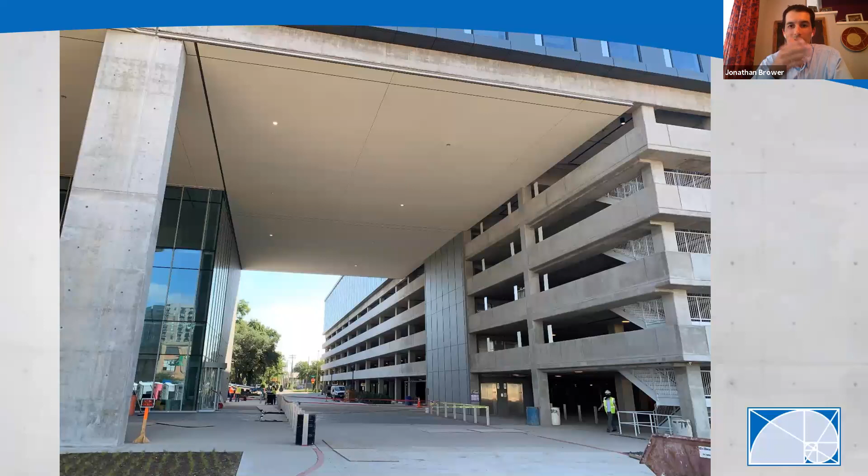Here's another look down Race Street, where the building straddles the street. If you look closely, you can see our expansion joint here and the blade columns that had to straddle that expansion joint. Tucked up in here is our slide bearing connection.

This is a look at the Race Street transfer girders from the other side. Looking to the west, this is where the employees drive in and then turn left and park in the garage.

Just about 3 weeks ago, this building actually won a design award from AIA Dallas, receiving an honor award from the AIA Dallas Built Awards Committee. It was really cool to see that the architects' hard work paid off. They had a vision for this kind of boundary-pushing design and helped it come to fruition. I appreciate being a part of that, and it's really cool to see your projects win an award like this. So another thing to be proud of on this project.

Finally, I just want to show you all a time-lapse video created by the building developer KDC. They got access to a building adjacent to the construction site and put a camera on the roof, which took a photo every 10 minutes. They condensed that down into this little 30-second video showing the project from the site work being done all the way to completion. So I'll play it now.

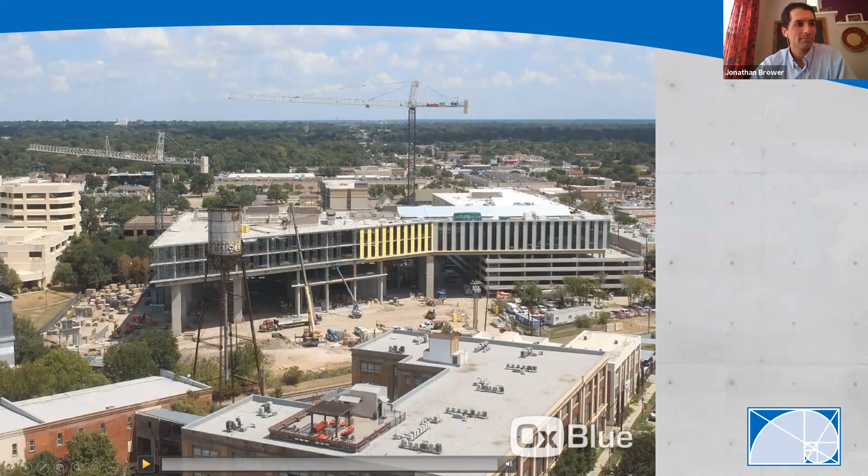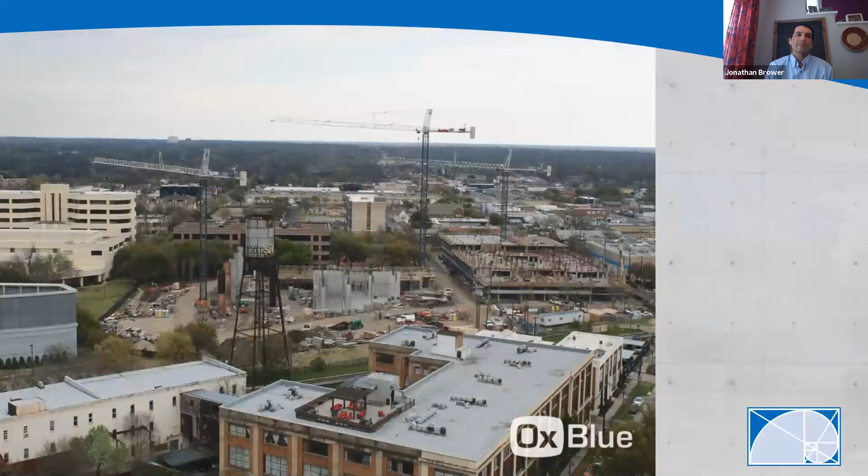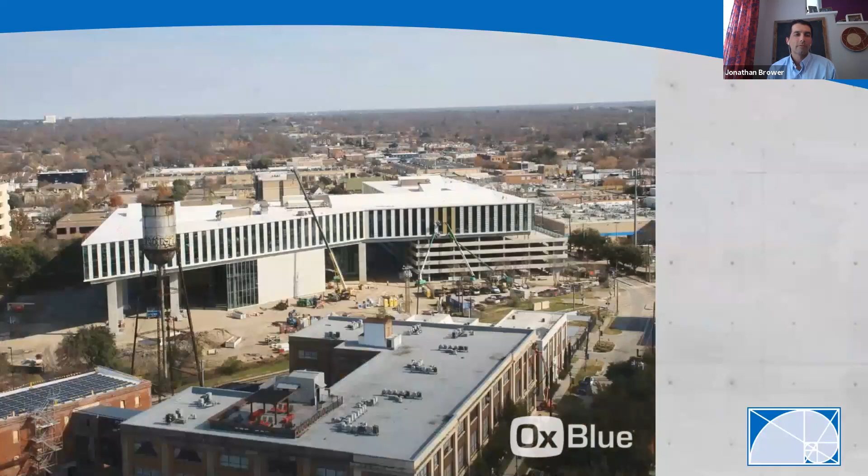They started on the right side first, working on the garage. You can see the tower cranes went up on the right side first, and the columns go up. Once they got going on those flat plate slabs, it went pretty fast. The site was so big that they were able to pour concrete almost every other day, because while they were waiting for one side of the building to cure and set, they could start working on the other end. So they kind of zigzagged back and forth across this building as they went vertical. And there's the completed building, basically as it stands now.

Okay, so that's the end of my tour for right now. I'm sure some people might have some questions, so feel free to fire away.

Jonathan, great presentation. Just wondering about the change in the column spacing and the change in the column size that the architect wanted. Was there any look at or concern about changing the cost of the building?

I think they knew all along that they wanted to have these extra wide spanning floor plates on these massive columns, so that was kind of built into the project cost all along. They knew this was going to be a special kind of monumental feature building. It wasn't like they always had the columns going all the way down to the base - the plan was always to remove every other column. So yeah, it definitely would have been a cheaper structure if we had all those columns going down, but the intent the entire time was to create this open space by transferring out all those columns.